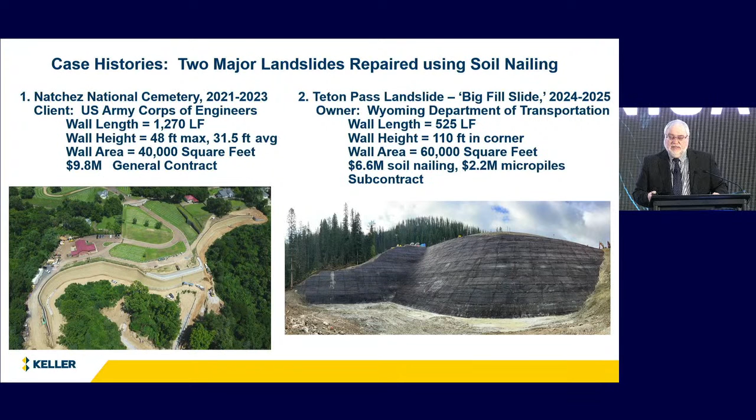So, Natchez Cemetery.

Another theme for my topic is repeat business, repeat clients. This was the third project we had done in Natchez for the Army Corps of Engineers. The previous ones were a long time ago, quite early, as I'll show you here.

If you've never been to Natchez, you should really take the time to go. It's really New Orleans in Mississippi. It's a very fun, lively town with a nightlife, an eclectic town with a lot of artists and really great food. I've spent a lot of time in Natchez, and I really love it there.

This is a national cemetery on the north side of the city. The city you see here on the left side is down a little lower, and as you work your way up the Mississippi River, that is the cemetery. That site is located there because it was the location of two really major Civil War battles where a lot of people lost their lives, and that's what the cemetery started at. It's still open to all branches of the armed services, and there were interments going on the whole time we were there. A really interesting place.

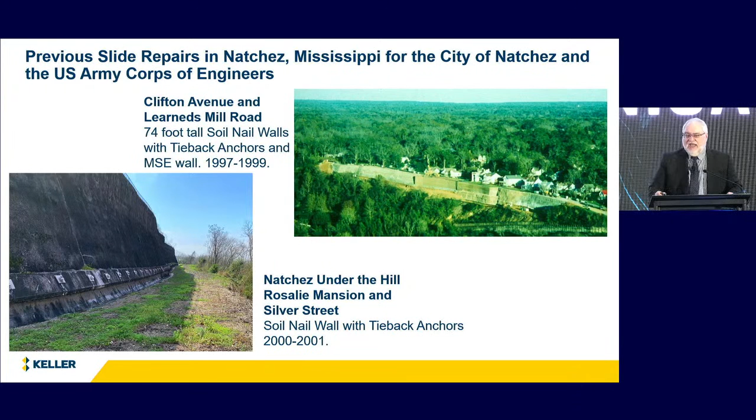Then in 2000, 2001, we did the Natchez Under the Hill and Rosalie Mansion at Silver Street. It's the wall you see on your left there, which is also a pretty tall wall, about 45 feet high, 50 in some areas, with a row of deep tieback anchors. So working for the same folks again for the Corps of Engineers. The first contract was actually for the City of Natchez, and then the second two contracts were for the Corps.

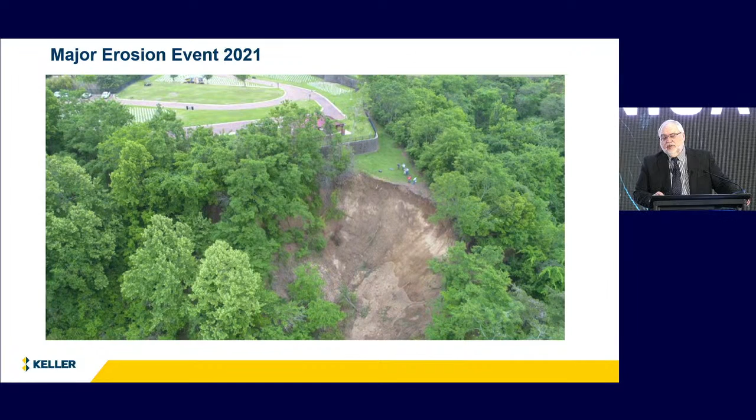The main erosion event that occurred at the cemetery was in 2021. It was a wet time, and the bluff was adjacent to this site. There was an MSE wall there and a pavilion, and during a particularly rainy time, this big slide occurred. They tried to save the MSE wall, but unfortunately it was severely damaged. They did the things that you're supposed to do - cover everything up with plastic and try to keep the water out, etc. But the wall was pretty much toast.

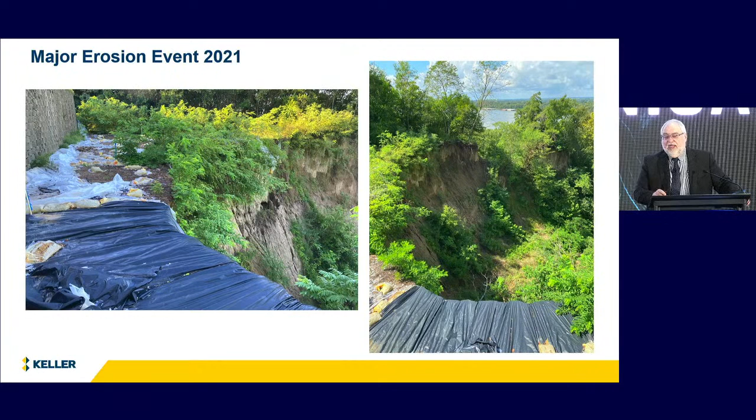And that got the ball rolling for a larger scope of repair all around the bluff where they had incipient problems that looked a lot like this.

The geotechnical conditions in this area along the Mississippi River are very similar all the way up to Vicksburg: you have this thick layer of loess. Some people call it loess - the German word I think is Löss, for loose - but it's a wind-blown silt that has a clay and sand fraction and also has a calcareous binder that kind of sticks it together. It exists in vertical bluffs very easily. In fact, if you try to put it on a 2-to-1 slope, if you cut into it, it will erode severely. So they actually cut it vertically if they're going to make a cut - they'll come down 10 feet, a little bench, cut 10 feet, etc. But it does erode over time; it is an erodible material.

This slide was in the loess, which is the Vicksburg Formation, and below that is the Natchez Formation, which has alternating dense sand and clay layers that make a really good material to bond pre-stressed anchors into.

When we first started working in Natchez in the mid-90s, we were doing tieback walls along Silver Street and learned about good bond materials in this sand. But also, the original idea came from a guy named Eddie Templeton at Burns Cooley Dennis in Jackson, Mississippi, and he called up and said, 'Hey, I saw you do a presentation on soil nailing. I wonder if we could do it in loess.' And I was familiar with the material, and I thought, I don't know - we'll have to see, we'll have to run some tests.

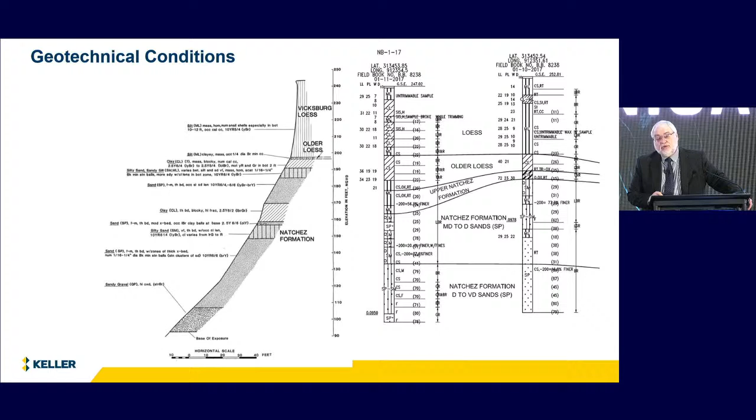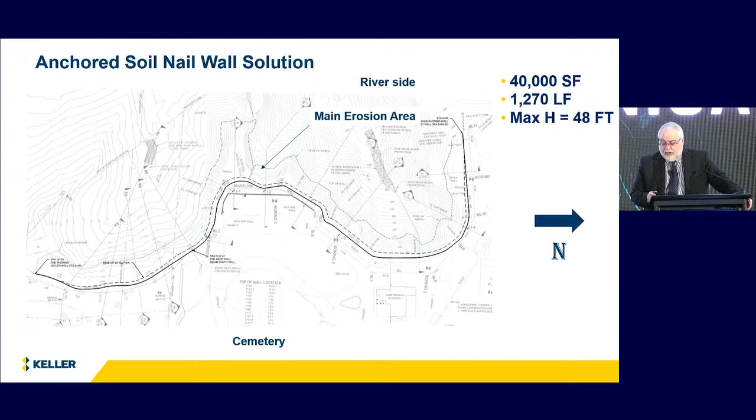Here's a plan view of the location. Like I said before, it's 1,270 linear feet, pretty long, almost a quarter mile. The erosion area that was the slip I showed in the picture is in the center portion. The cemetery is on the bottom of the slide, and the riverside is on the top. It meanders around the cemetery, and even goes around some residential houses on the side that were threatened as well. The maximum height, as I mentioned before, is 48 feet, average height 31.5 feet.

I'm not going to talk a lot about design, but let me mention a few things. The consultant for the Army Corps of Engineers on this project, who wrote the report and did the borings, was Burns Cooley Dennis out of Jackson, Mississippi.

The thing about doing this type of soil nailing, as you saw in the pictures and references, is you can get really great stability numbers, but the nails have to be really long, and they're closely spaced—maybe 5 by 5, 6 by 6 feet or whatever. The lesson we learned early on was that you can soil nail and get decent internal stability, but to get that external, global stability, you include a deep anchor.

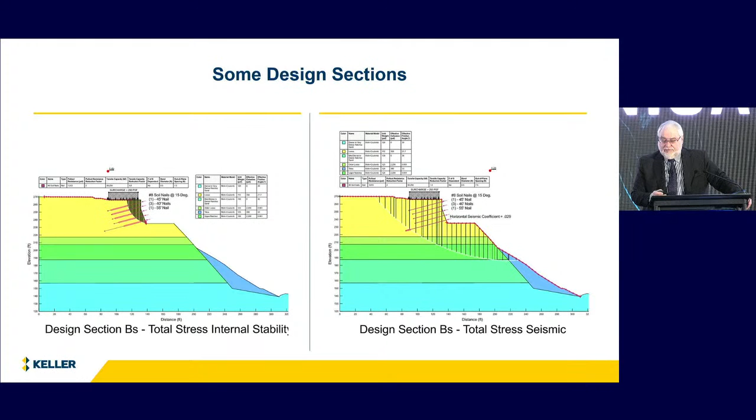This is another section showing internal stability and external stability at a different location. For the external check, we're applying a pseudo-seismic acceleration specified in the specs by the Corps, and checking our factors of safety. So that's the design.

So that's the concept—soil nailing for the 40 or so foot sections. It was 7 rows of soil nails, 40 to 50 feet long, on a grid pattern of 6 by 6 feet or 6 by 7.5 feet horizontal spacing, and then a single row at the bottom of the wall of deep tieback anchors, 150 to 180 feet long.

What we did was come up with a concept to shotcrete a big waler beam, a reaction beam at the bottom, that would support the loading from these big post-tension anchors that provide our global stability. The tricky part about this soil nailing is the failure surface comes right up to the surface.

You'd like to soil nail from the ground if you can, but if you don't have enough room to make a bench, you have to reach over, etc. It makes your soil nailing work better if you're on a batter—the forces work out to be much less—but you really can't batter if you've got a constraint at the top, either a structure or lack of room.

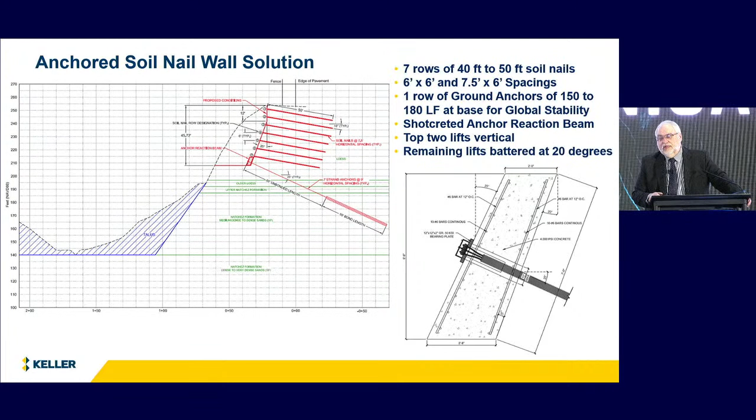So what we did here was go vertical for the first 2 lifts to give us enough room to get a bench in, so our people could work on foot. Then as we went down, we had enough room to get a drill and personnel in at those lower levels. So vertical for the first 2 rows, and then we battered the wall out at 20 degrees, which really decreases the forces required to get the proper factor of safety.

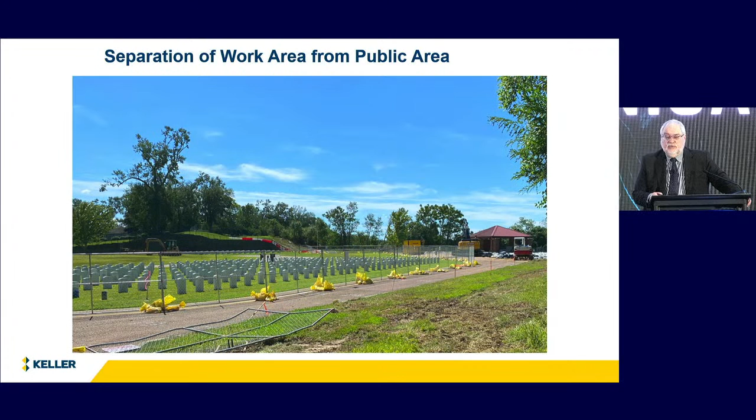So we separated our work area from the cemetery. As you see here, the access road—we were right adjacent to the graves in this area. And when the MSE wall failed, it also severely damaged an interment pavilion that was located there.

That had to be demolished as part of the project. We also had an additional scope of building a new MSE wall, but this pavilion was not replaced because there really wasn't room for it anymore. We actually stepped back into where the footprint of that pavilion was in plan view.

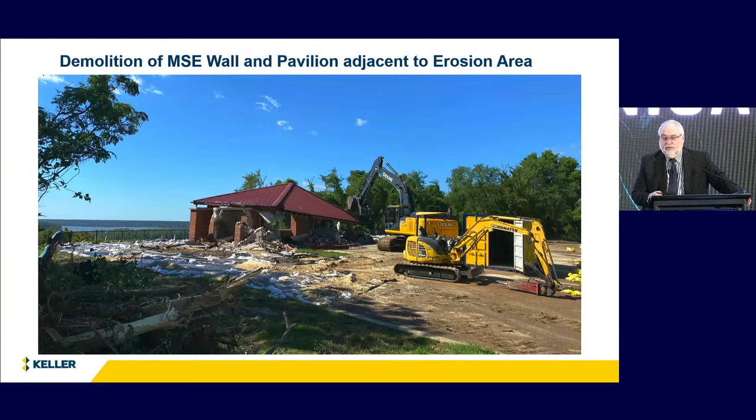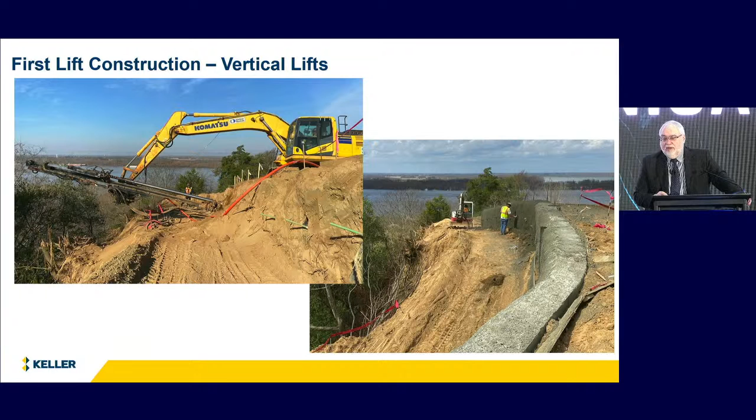These are not hollow bars, they're solid bars - number 8, 1-inch diameter, epoxy coated all-thread bars. Here you see the soil nails being drilled in, and then the shotcrete installed lift by lift. This is a top-down process, which is very economical. Instead of building the wall from the bottom up, we build it from the top down as we go.

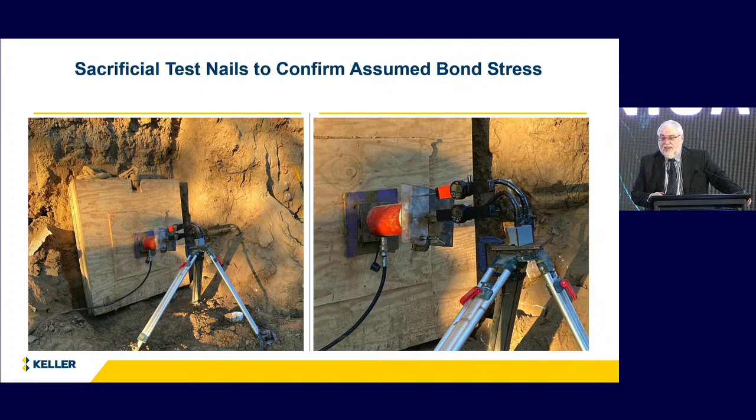We ran a series of pull-out tests on every row to confirm the capacities we assumed in the initial design. These were sacrificial nails, a little shorter than the standard nails typically - some are long, some just as long, some shorter, depending on what we're looking at. So you're looking at bond all the way along the nail. This is not a post-tensioned element, it's a passive reinforcement, and they're fully grouted.

Here you see the shotcreting process. We go down lift by lift, 6 or 7 feet at a time if we can. Soil nails are drilled in, and then we apply reinforcing to the ground.

You can see the loess soils here in the foreground, kind of a tan color, tannish yellow - loess actually exists all around the world. 15% of the world has loess, some type of wind-blown silt on it. This loess came from the glacial age, Pleistocene age, when there were braided streams during the melt that ran down along the Mississippi River Valley, and wind would blow the silt in the dry times and cover up a lot of the areas down the center of the U.S.

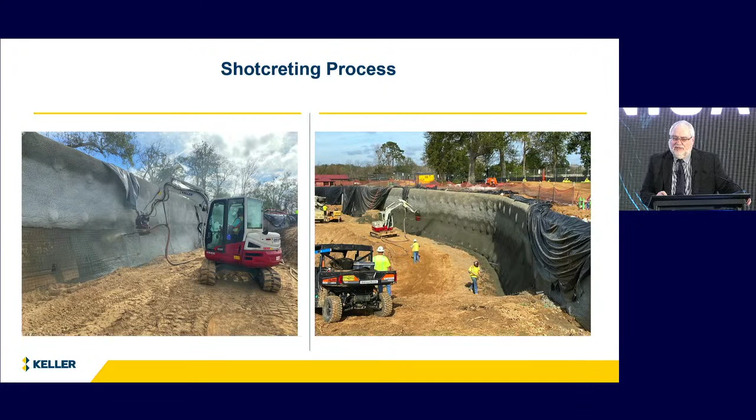Here you see our robotic arm for shotcreting. It's a very safe way to do it. It's a challenging process to do shotcrete properly, and it's not for the faint of heart, but this is the shotcreting process. Here you see we've gone vertical now for two lifts, and now we're coming out at that batter, the 20-degree batter, drilling nails in and working our way down from the top down.

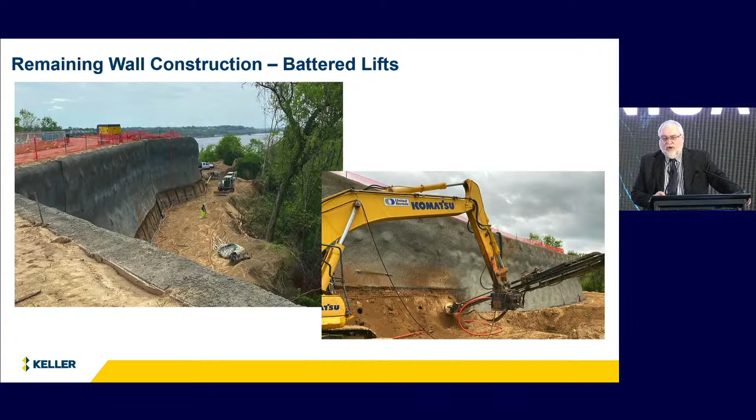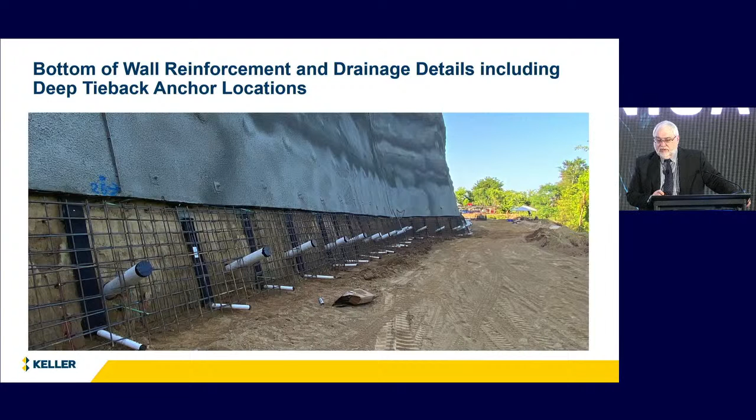At the bottom, this will be the location - you see these big PVC tubes. We're creating a void through that lower reinforced shotcrete reaction beam using these PVCs. You also see the drainage - these are chimney drains placed in the rows between the soil nails to keep any hydrostatic pressure from building up behind the shotcrete. It's a watertight concrete system, so this gathers the water so it won't build up behind the shotcrete. Then we put weep holes at the bottom, and there will be a paved ditch at the bottom for the weep holes to drain into.

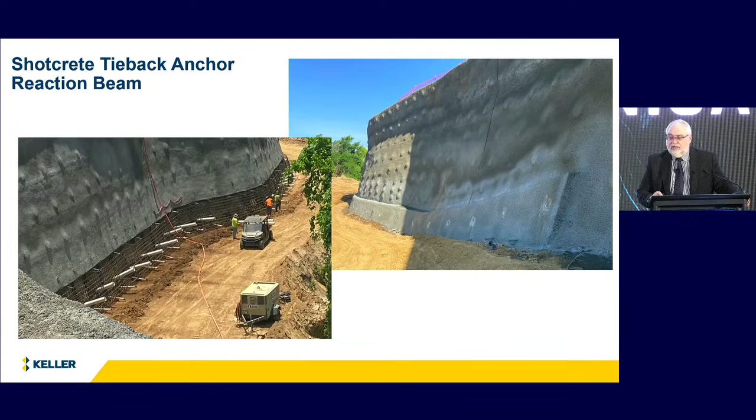Just another view here - you can see the change in angle in the wall from vertical to the 20-degree, and then prior to shotcreting, the reaction beam, and after shotcreting but prior to the anchor drilling. Then we brought in a hydraulic track drill to drill these deep 150-plus anchors. We use strands for these to get to these high loads of almost 250 kips. The spacing varied depending on the design section, the height of the wall, etc., for these strand anchors from 6 to 10 feet center to center.

There you see an uncoiler that we're using to uncoil the strand anchor down the hole. It also includes a throwaway tremie tube that stays in there, which we use to pump the cement grout from the bottom up. It's a 0.45 water-cement ratio grout that hardens typically in the range of 8,000 or 9,000 PSI - pretty strong.

So we had a tricky outside corner, which I don't know if you noticed in the plan view I showed earlier. To deal with that, I like doing it radially. Some people try drilling crisscrossing anchors, but I've found through the years that radial support actually matches better with the earth pressures applied, and works very well as far as avoiding interaction of drill holes.

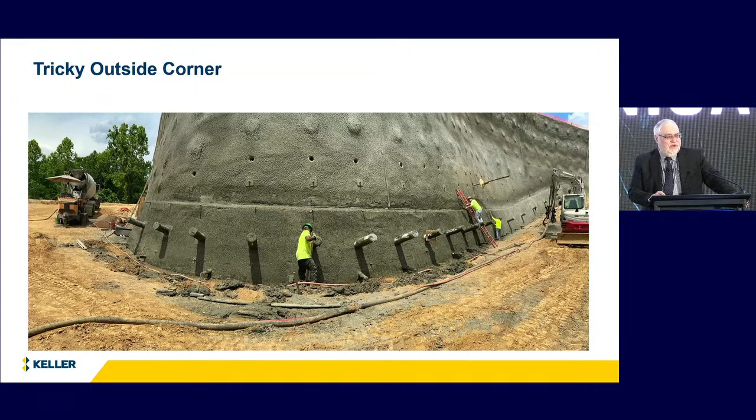One of the things that happened on this corner was - you're trying to excavate around a corner, trying to keep a 20-degree angle, and it's pretty hard to do. So we lost our 20-degree angle there, and it was noticed by our crew and the Army Corps people. We reported that back to our designers, and it actually decreased our factor of safety because you get a little more earth pressure load when you're not on that angle. So we had to add this extra row - you see the drill holes are in there around that corner - to get our factor of safety back up.

The MSE wall was replaced at a slightly different location back from the bluff area and from the soil nail wall. We subcontracted that to a small contractor out of Mobile, Alabama. They did a great job.

Then the wall was stained using a concrete stain to match the loess, and this is a picture here of us applying that stain.

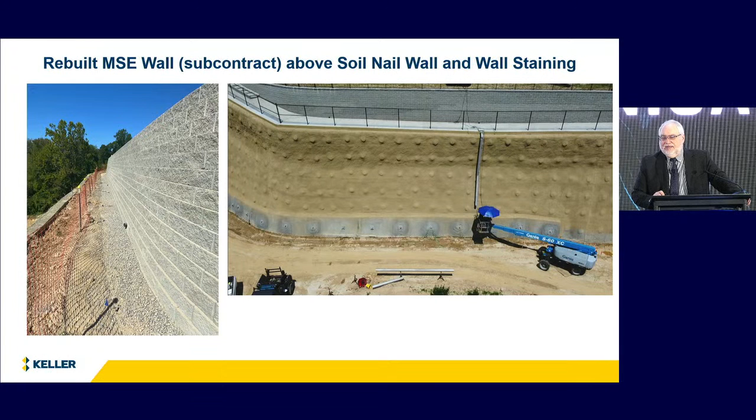You also probably notice the bumps at every soil nail location. We do that for economy rather than using a lot of shotcrete to provide the necessary 3 inches of cover or so. We just bump it up around the bearing plates at those locations, and so this is called a bump wall, and that's what the bumps are all the way around.

At the end, we got to the bottom and created an access road as required by the specifications. We put in a ditch to collect any water out of the weep holes, and then they were accumulated with pipes that ran underneath the access road and were taken downhill with an elevated pipe structure at the low spots and put into gravel ditches to be drained down to the river.

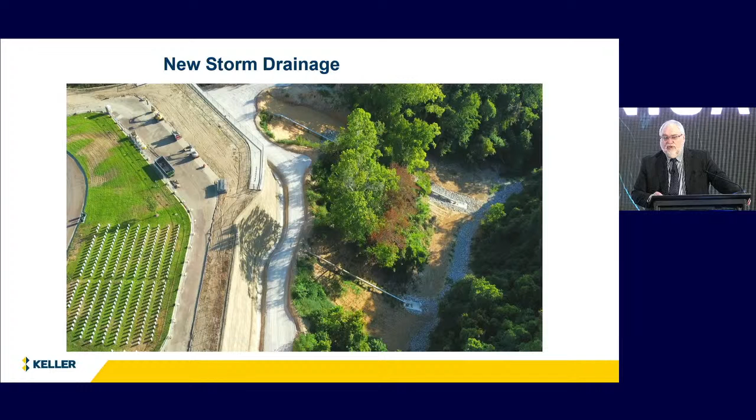And there it is from a drone view all the way around. This isn't exactly at the end, but about the best shot I had. There's also a small MSE wall on the upper right-hand corner there to make the grade transition.

So it's a very successful project. We love working with the Corps. They're good people, they're smart, they work hard, and so do we. It was a very successful project, and one that I'd love to do repeat work with repeat clients.

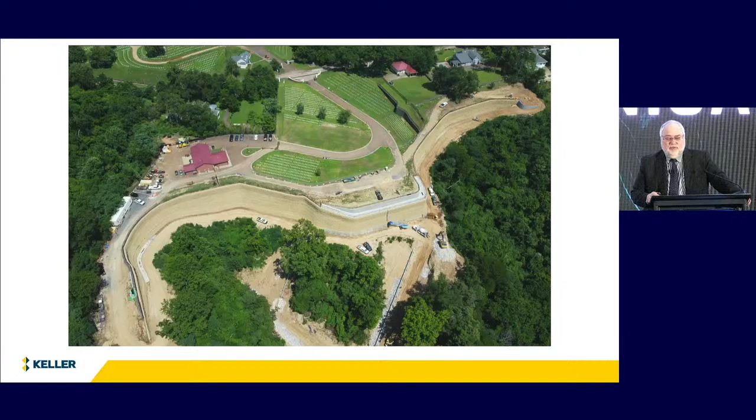So let's talk about another repeat job. This is a very recent project, it was on the news. I don't know if any of you heard it in the summer, but there was an unusual rainstorm that occurred in Wyoming near Jackson Hole, near Jackson, Wyoming. They got a tremendous amount of rain in just a very short period of time.

There was a lot of water that came down out of the mountains due to that, accumulated in the valleys, and there were mudslides at a lot of different locations. One of these mudslides occurred on June 7th, 2024, between Victor, Idaho, and Wilson, Wyoming.

Jackson Hole is a very expensive place. It's kind of a rich people's playground with skiing, very expensive rents, very expensive restaurants. Unfortunately, the service people who service a lot of those restaurants and hotels can't afford to live there, and the rents are just too high. It's like $3,500 a month for a studio apartment. So a lot of them live in Idaho and make the commute every day back and forth to Jackson Hole.

They take Highway 22, which goes through the valley or the pass, called Teton Pass. When the mudslide occurred on the 7th, the road was fortunately closed because it was covered with mud, and then some of that water built up at a really high fill location closer to Wilson. Further down, the mudslide was a little bit northwest of the landslide in the picture here, and a really big landslide occurred in a place called the Big Fill, which was a 100-foot fill placed so they could build Highway 22 through the mountain pass.

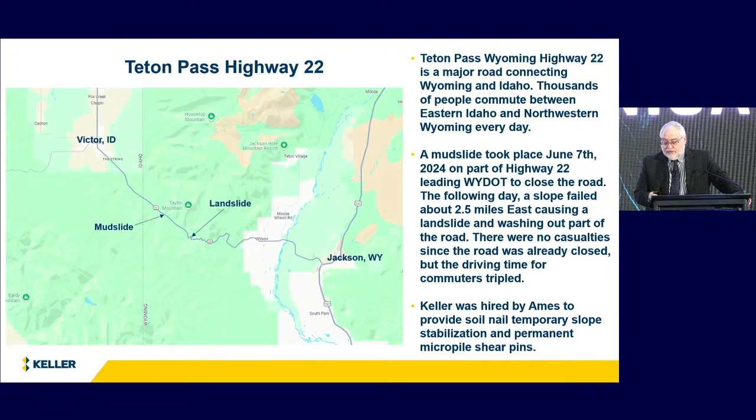So the DOT put out a request for bids. We teamed with general contractor Ames Construction, and were able to fortunately get the job.

We had a nice resume to submit to the DOT for our proposal, with 2 previous landslide projects in western Wyoming. The first one was the Blue Trail slide that we did in 1997. It was a micropile and tieback wall system consisting of 3 different walls and some really big tieback anchors, up to 18 strands, because of the high seismic requirement for the design. And that one went really well.

Both these projects are actually in the Snake River Canyon. If you look on the map on your left, the landslide is in the circle, and the Snake River Canyon is down in the red dot there.

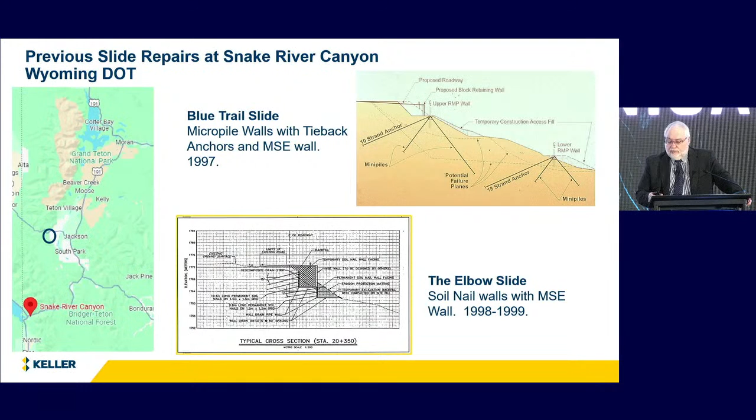The second project, shortly after Blue Trail, was called the Elbow Slide, where the Snake River turns 90 degrees, known as the elbow. The energy of the water going around that 90 degree turn ate into the slope and was causing many slides that required road repair over and over again. We solved that with 2 soil nail walls, one in a step fashion above the other, and also built an MSE wall in front so they could widen the road in addition to repairing the slide—similar to what we did at the Natchez Bluff.

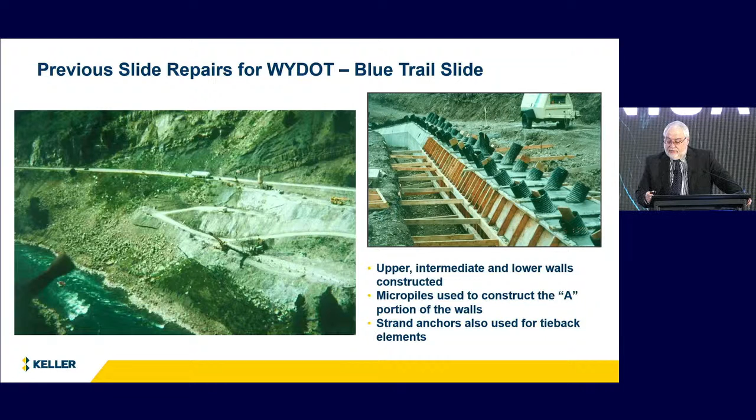It was a very fun project, one that had federally sponsored $100,000 of instrumentation back in 1997, and it's been through a lot—a couple of big earthquakes, a debris flow—and it's still there, so that was good.

At the elbow, we had these 2 soil nail walls. The lower wall we buried, so you can't see it after we installed it. The upper wall ran into a very short construction season due to eagles nesting in the area—we weren't allowed to build while the fledgling eagles were in the nest. So it ran over a winter, and this was actually our very first use of the mesh and geofabric system, a temporary steel mesh wall that lasted over the winter. Then this MSE wall was built the following year.

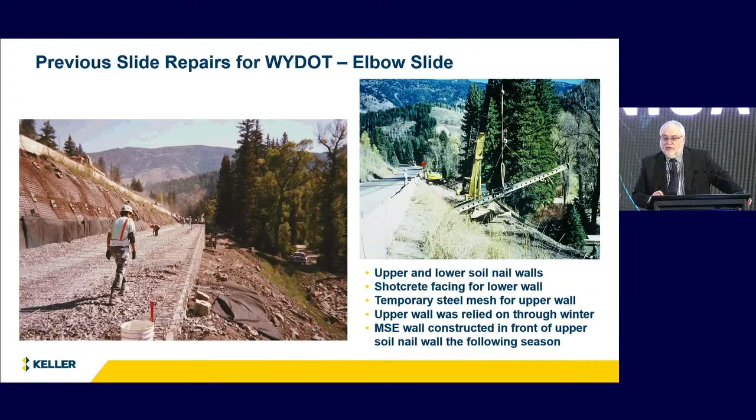But good work for good people, and they brought us back.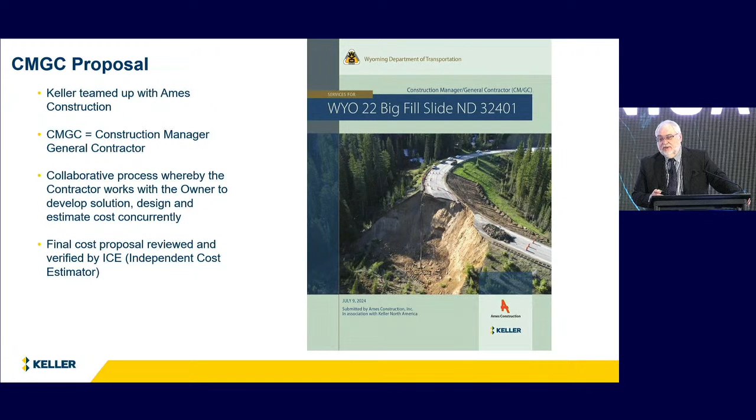The way the CMGC works is you have a collaborative series of meetings with the owner, you develop a solution and a cost estimate, and then the final cost proposal is reviewed by an external independent cost estimator. So we were successful in getting this project with Ames.

So let's talk about, okay, excuse me—first of all, not a bad place to work, okay? If you look here, we've got the beautiful Teton Mountains, Jackson Lake, Jenny Lake, ski lodges, and the job site was located in these areas.

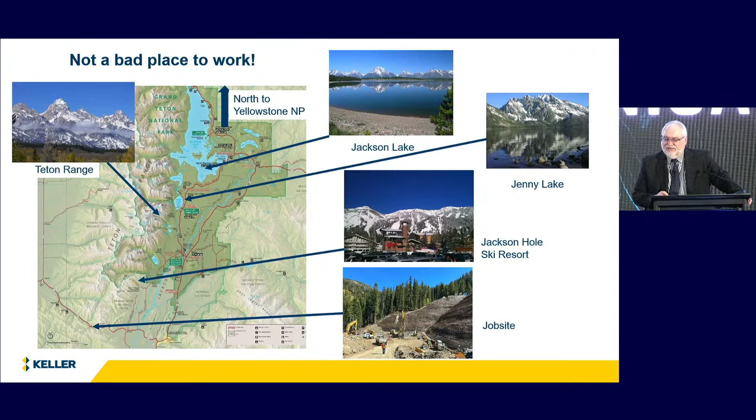It was pretty funny—our guy who goes and gets the rooms for everybody, he goes out and gets something in Wilson, Wyoming, where there were 3 restaurants: Burger King, McDonald's, and a gas station. So our guys lasted about 10 days, and then were in Jackson Hole, and made the commute. We were fortunately able to get Airbnb, so we didn't have to pay the ridiculous hotel fees. But we had lots of volunteers for this project, let me just say that.

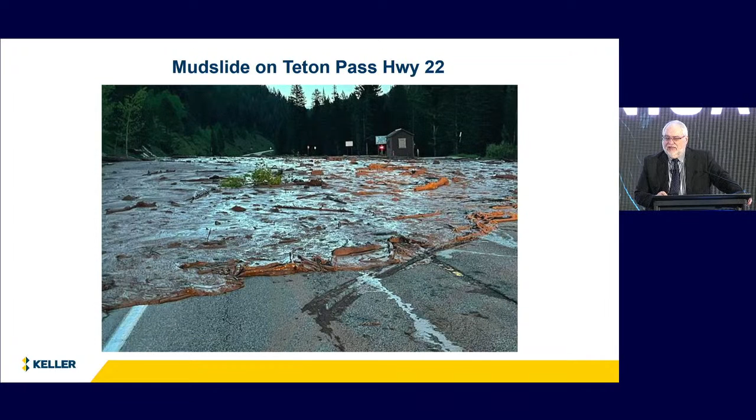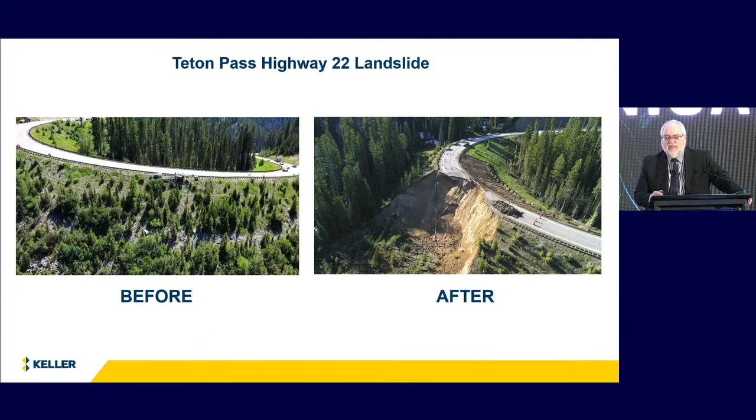Here is a photo from the DOT of the mudslide that closed the road, fortunately, which happened about a mile up from the big slide. They had a precursor, some warning that there were going to be problems here, and had already installed an inclinometer and just started to monitor it. Unfortunately this rainstorm came in, and this is a video after the first big slide occurred.

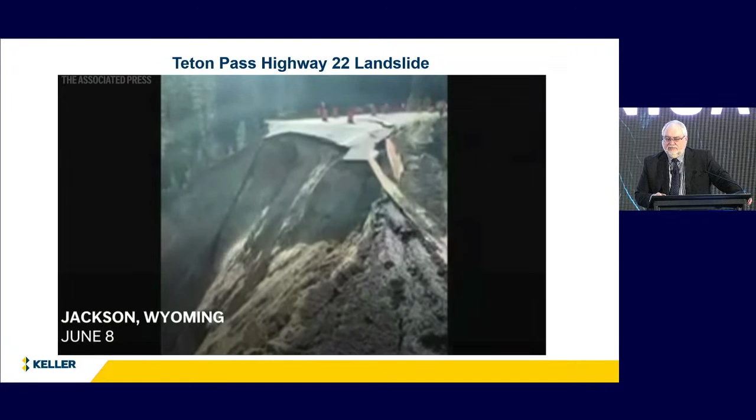I'll just watch this here for a second. So there goes the inclinometer.

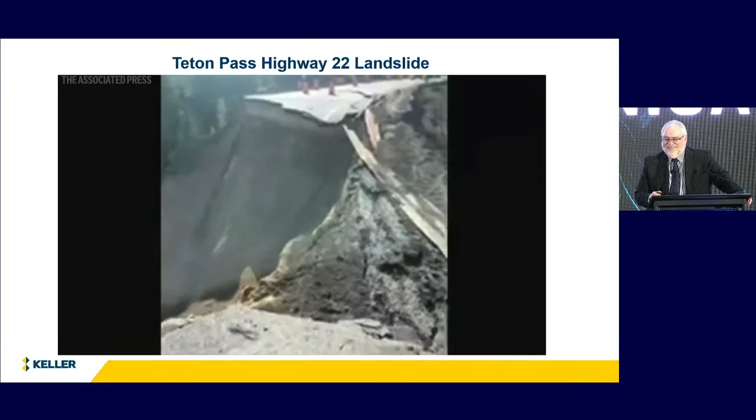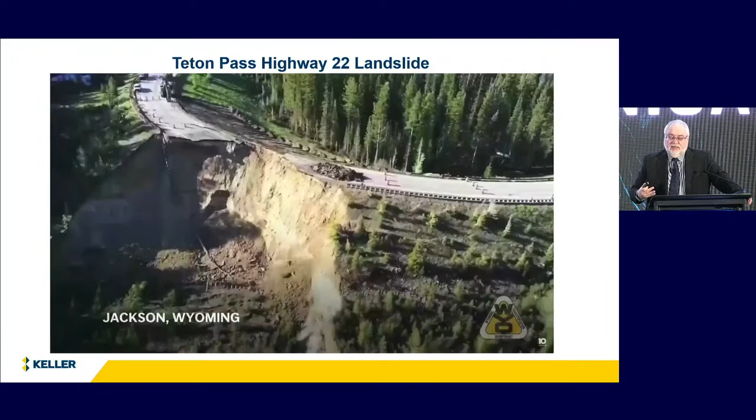So the road was closed, obviously, and then this is just another view. So they immediately began stripping the organics on the inside of the curve and hired a contractor to build a runaround on a very tight and steep grade.

You can see there the organics being stripped. They're getting ready to place 2 lanes on the inside of where this happened, and in the meantime, negotiating for a permanent fix.

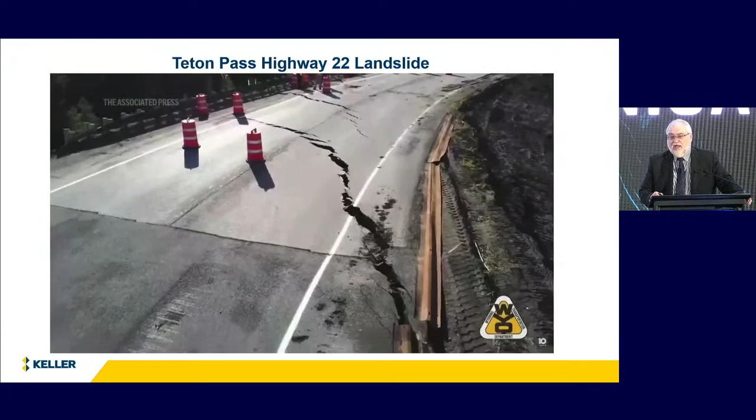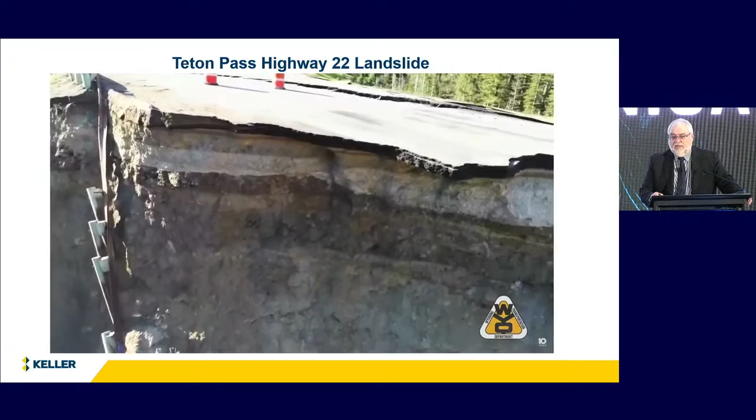That's the guardrail hanging down there. But there was a patch at this location and more guardrail at the bottom there. You can see the guardrail coming down. So basically, you had this huge rain event.

It caused where the lay of the land went from left to right there. It caused this mudslide to occur down below, but it supersaturated this 100-foot fill on the left-hand side here. And so they had a real high spike in the groundwater table, and that's what happened here.

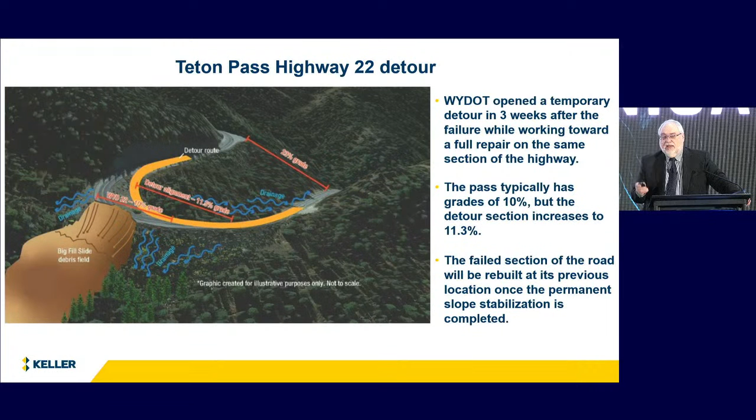And then the yellow that you see here is the temporary detour that they were able to open in 3 weeks and help the commuters while we were getting ready and designing and mobilizing to put in the permanent fix.

The permanent fix was designed by Wyoming DOT consultant out of Colorado called RJ Engineering. And the idea was a reinforced soil slope that consisted of lightweight fill. They had initially specified flowable fill, but there was no way to get a fluid material on this steep slope and to keep it there.

And so Ames convinced them to go with a lightweight fill, in this case, a recycled glass material that was sourced from the East Coast. And so this is the design that RJ came up with.

It was a 1.5 to 1 excavation in the fill itself in front of the detour. It's 100 feet deep to get to the geometry needed for the final pavement location. It was late in the year. This is at an elevation of like 7,800 feet, and so the snow flies early and it gets cold.

And they specified temporary shoring by the contractor, that you see in the blue box here. We decided to go with soil nailing, and then in addition to the lightweight fill, there are some drainage layers that you see here on the bottom and up the side, the slope side, the excavation side, are drains, and this aggregate, this lightweight aggregate, is also free draining. So the whole idea is to get the water out of the slope, right?

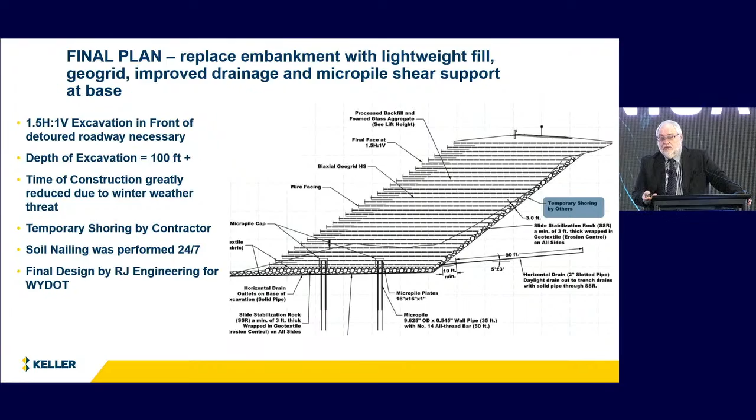So it's a little hard to see here, but basically it was an L-shaped system of soil nailing. The soil nails, originally we had 599 nails, but the geometry worked out as built to be 583. They're 40 to 50 feet long. The side against the road, parallel to the road, was 410 feet long, and then the turnaround cutback was 115 feet long.

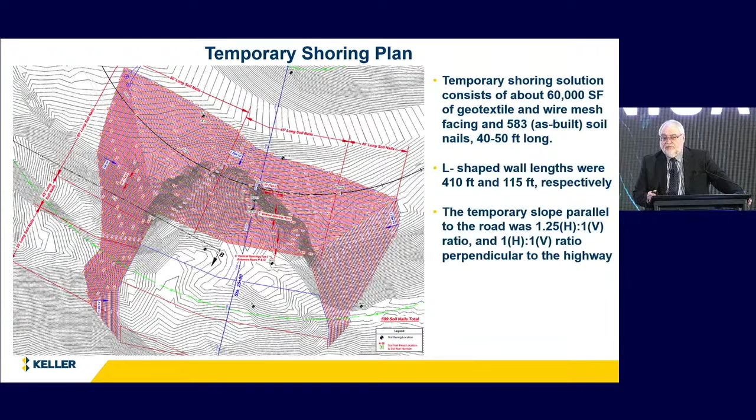So 14 rows of soil nails. They were on vertical spacing of 7 feet. The maximum length was 50 feet long.

So when we first designed it, the WYDOT folks went out and drilled a bunch of borings, but they couldn't drill a boring at this location where the one is shown on the right here because the land was gone, right? And so that boring that's shown there was not a sampled boring, that was the inclinometer. And so they didn't do any sampling.

All we had was a visual description of silty sand, gravelly sand, and then weathered shale. And so nobody could find that log. So it was eventually found, but after the design had pretty much almost been complete.

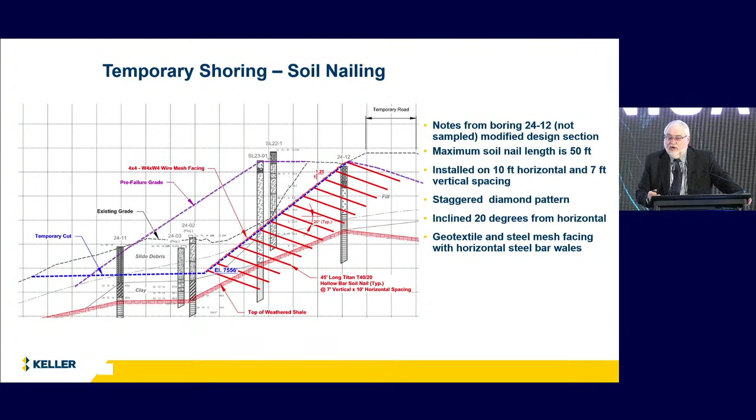And so by taking that qualitative log and being a little conservative, it put a little bit of a hump in that red line there that is the weathered shale that you see there. Prior to that, our design went more, that line went on a much less steep angle. And so initially we thought the factor of safety was going to be much lower because that's a clay layer in there. And so we didn't know that the rock was actually going to hump up there a little bit. So that affected our design midway through.

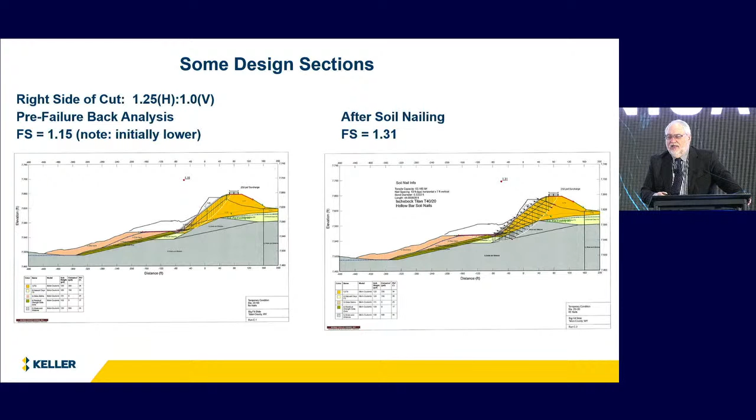But once again, that was a qualitative boring. We didn't really know what was there, so we hedged our bets and back calculated the parameters, coming up with a design with a final factor of safety of 1.31. On the far side, where we're cutting into the natural slope on a 1-to-1, we back calculated that if we made that cut, it would be as low as 0.88 factor of safety. So we designed our soil nailing there to provide a factor of safety of 1.3 as well.

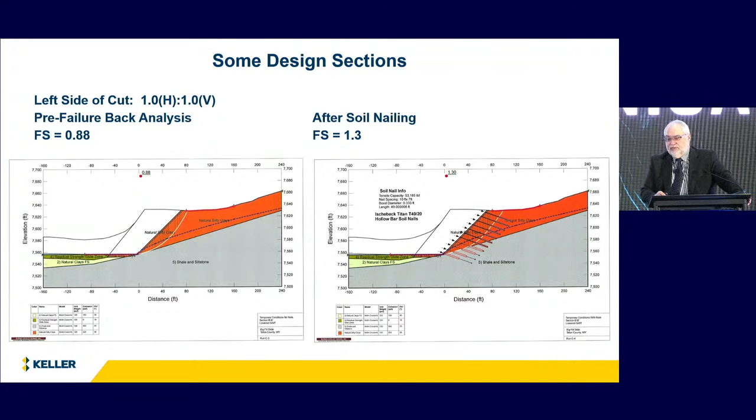In this case, we used a different type of soil nail, a hollow bar soil nail made by Ishebeck. This is a 40 millimeter diameter, 20 millimeter interior hollow bar that you can flush in place using weak cement grout. There's no actual drilling tool that you use. You put a throwaway bit on the end and flush them in place using a weak grout. When you get to the bottom, you pump thick grout, and it's an automatically grouted soil nail.

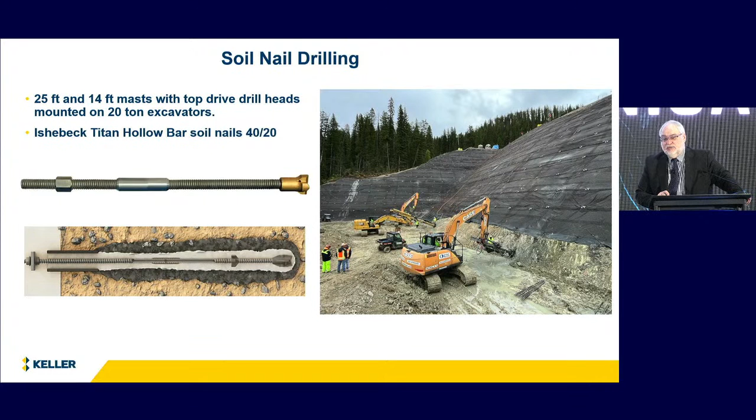We had 2 different rigs working 24/7, 4 crews, 7 days a week to try to beat the winter. One of the masts was a 25-footer, the other a 14-footer, mounted on excavators. This is just a detail of the soil nail.

They come in 3-meter sections with a coupler, and you flush them down to the required depth, which in this case was 40 to 50 feet, and leave that bit in the ground and pump them up with grout.

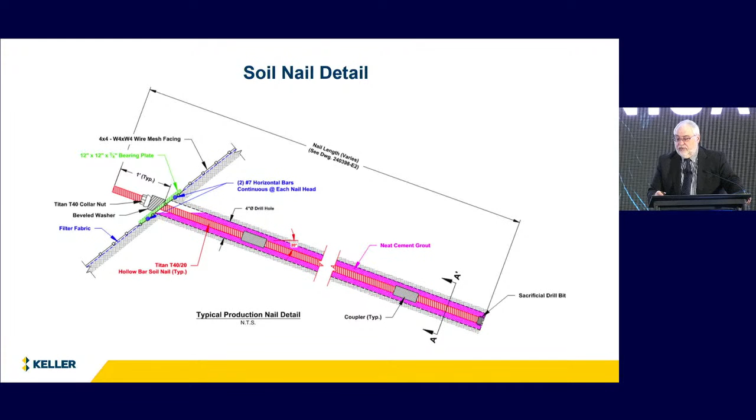In this case, we decided not to use a shotcrete facing. We were in a hurry, and it was going to be cold, so we came up with this soil nail facing that consists of a geotextile with welded wire fabric over it. Those welded wire fabrics are attached together with high-strength hog rings and aligned with tie wire.

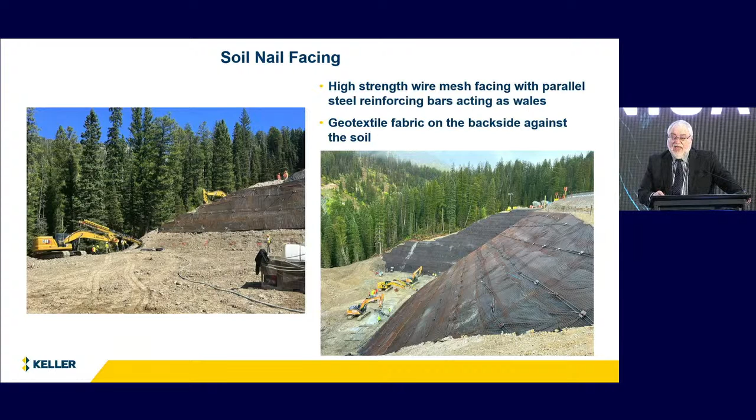In between the individual nails, we create a wale using horizontal number 7 bars that go underneath the bearing plates, which are 12 inches square. So this is a fast way to do temporary soil nail facing.

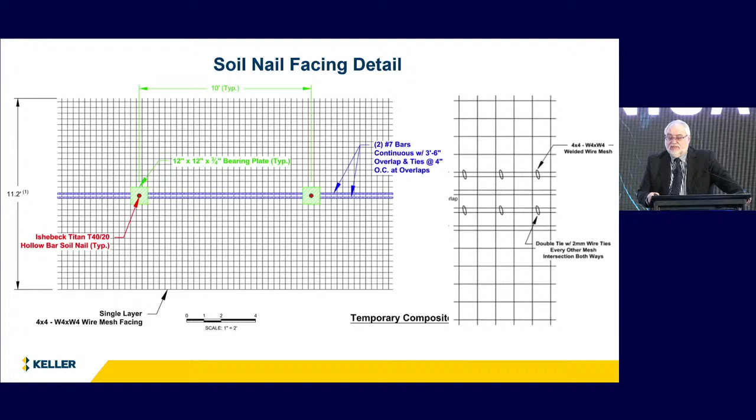This is just a detail of that. You see the horizontal bars from nail to nail, and the details of the 4x4 W4xW4 mesh. It's a high strength mesh, and it keeps the soil filtered underneath with a non-woven filter fabric.

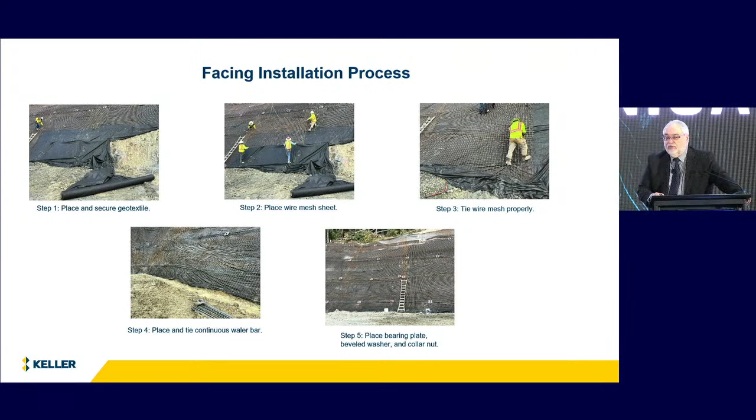We tie the wire mesh sections together, place the wale beam from nail to nail as shown here, and then put the bearing plates on the nails with a beveled washer and a nut and tighten them down. So pretty simple and very effective.

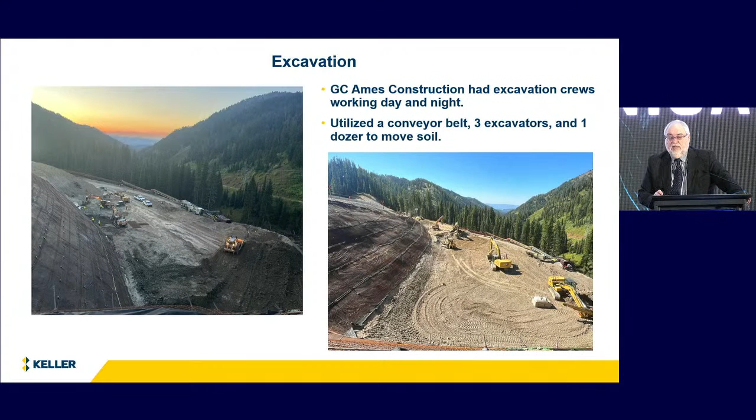The excavation was done by the general contractor Ames 24/7. They used a conveyor belt to get the soil out, a very long series of conveyors. They had 3 excavators and a dozer to move the soil, and they were always moving soil 24 hours a day. It was a large earth-moving project.

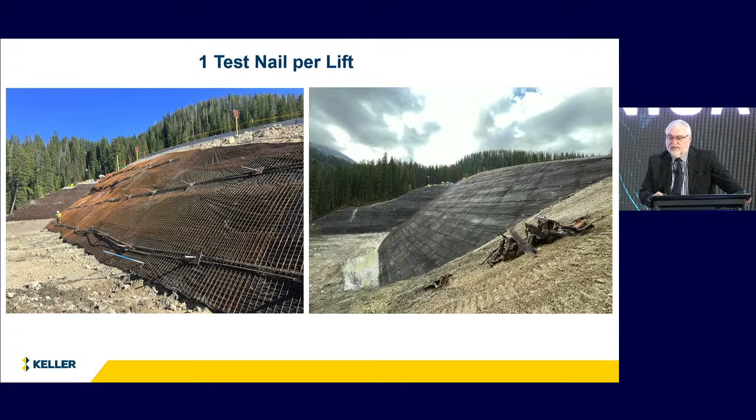We also did the test nails as described earlier, 1 per lift. That's the blue bar you see there, with a protective PVC while we're building the facing, and we went in and ran pull-out tests. We got good pull-out in this rocky fill material.

So there she is, it's a big wall. We did it in 5 weeks, 60,000 square feet. It was a tremendous effort of our crews, and we're very proud of them for that.

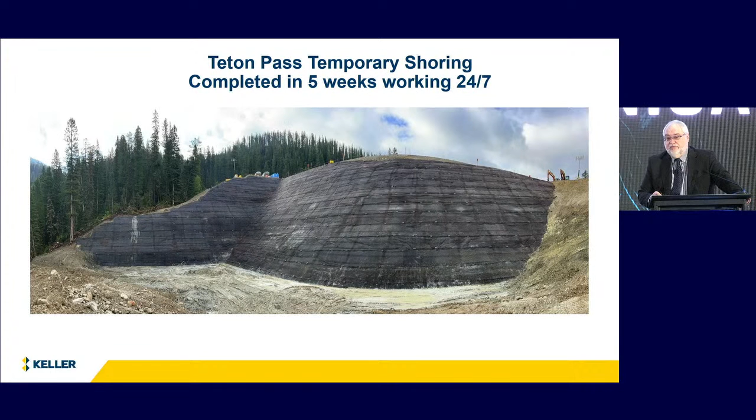So then, as part of the final design, Ames hired a specialty contractor out of Oregon called Jensen Drilling to do horizontal drains. There were 5 drains required, drilled 90 feet from the bottom of the soil nail wall into the backfill and the natural materials shown here in the blue lines.

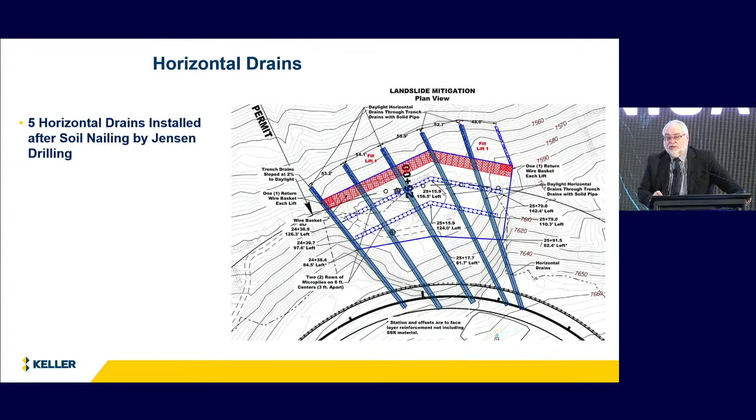The blue line across the bottom is the bottom edge of the soil nail wall. They would extend those drains through the new fill being placed out to the outside of the final wall. So there you see the location of the drilled drains in the blue line. They were 90 feet, drilled 2-inch diameter slotted pipe, on a 5-degree upward angle.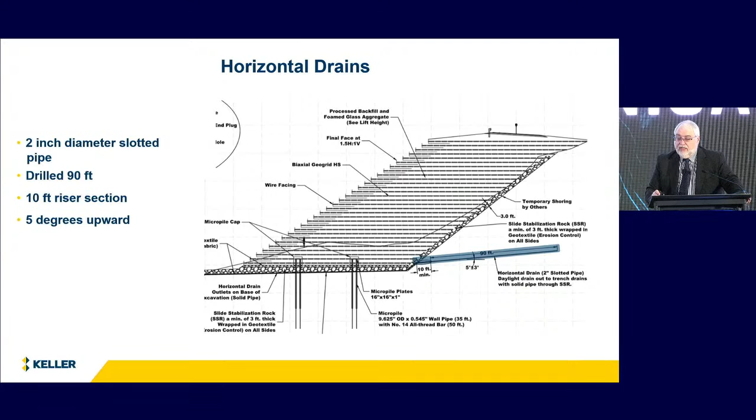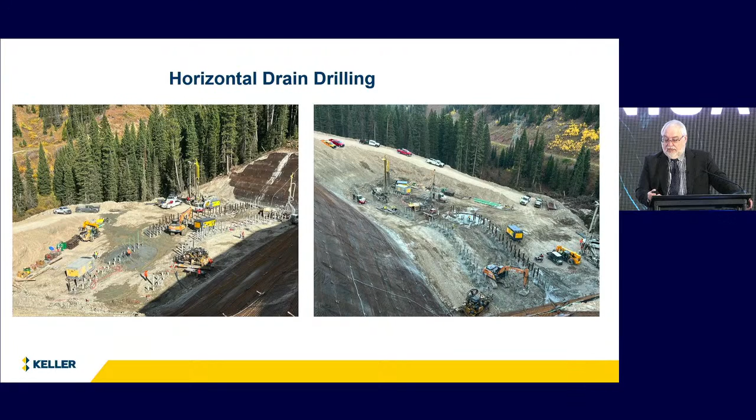As I mentioned earlier, as designed by RJ, were these permanent slope stability micropiles. There were 140 of them, 50 feet long, consisting of 9 5/8 inch outer diameter pipe and an interior 75 KSI bar, full length. The pipes were 35 feet with a 15-foot rock socket.

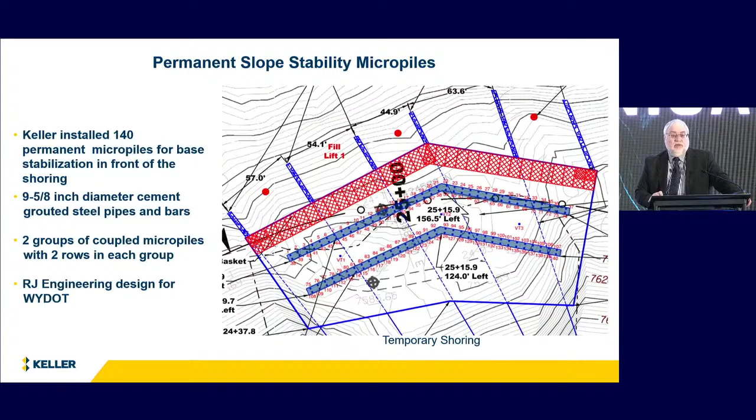When we first started drilling these, we encountered some very soft clay materials that were highly plastic in the drill cuttings, which was a matter of concern because of the earlier time when we thought, hey, I wonder if there's some residual material here from the slide, or is it natural, et cetera. So that was a concern.

Here you see the locations of the micropiles. We left 8 feet of pipe sticking up out of the ground. We were determined to do further investigation into that clay, and had a series of meetings.

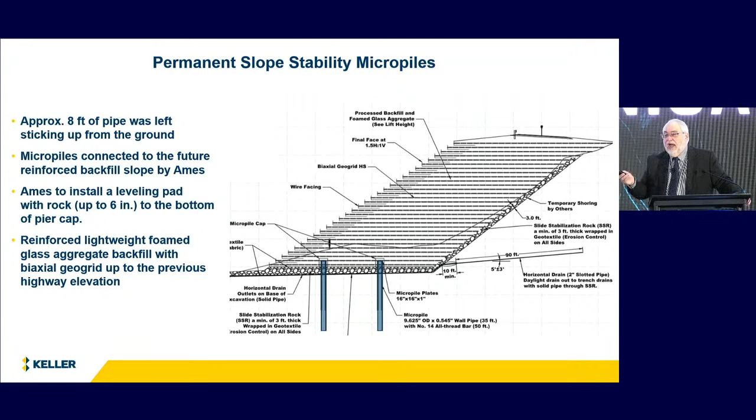Here you see the layout of the micropiles and the location of the lightweight foamed glass aggregate backfill. There are layers of biaxial geogrid that run the horizontal lines you see there. Here's the layout where each micropile cap is a 4-foot by 5-foot reinforced concrete cap. The micropiles were spaced in pairs, 10-foot center to center, with 15-foot rock sockets.

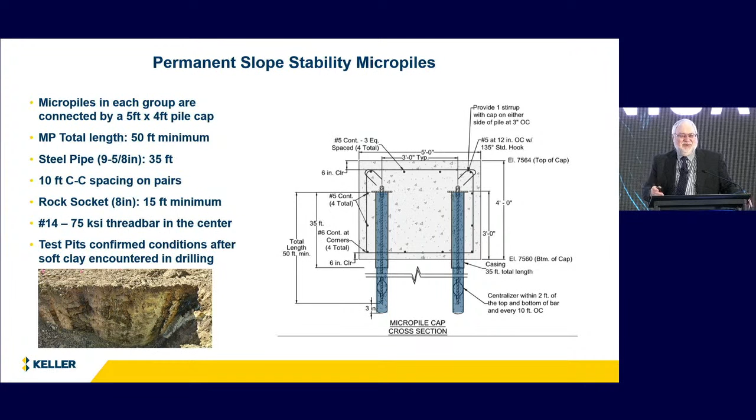So we dug some test pits, and you can see on the lower left-hand side, on the right-hand side, there's a white clay-looking thing. It was like a montmorillonite that was either a mylonite or a gouge, fault gouge or something. It was very isolated. We dug 5 test pits all along, and that was the only location, right where we were drilling the micropiles. So it was a false alarm, which was good.

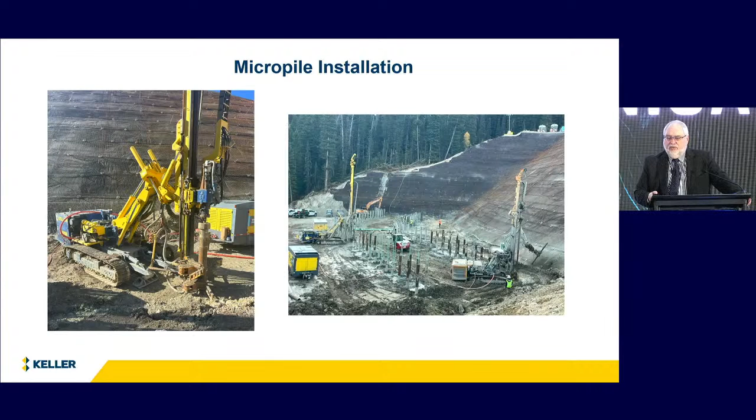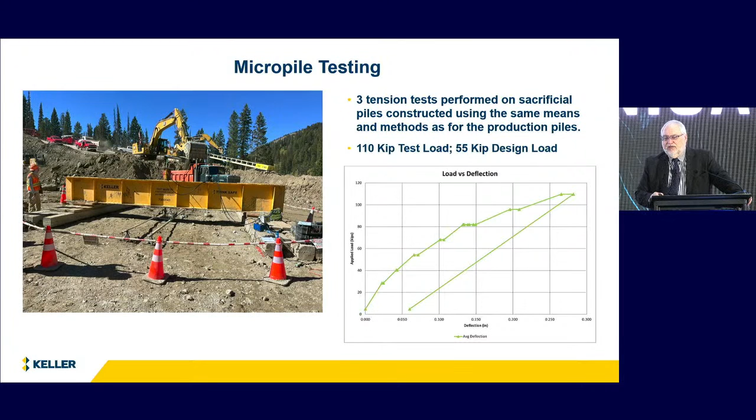Here you just see some construction pictures of the micropiles. We had 2 drill rigs, brought in a new superintendent who was a micropile specialist. We ran 3 tension tests. The design load was only 55 kips, with a 110 kip test load. We ran those tests in tension.

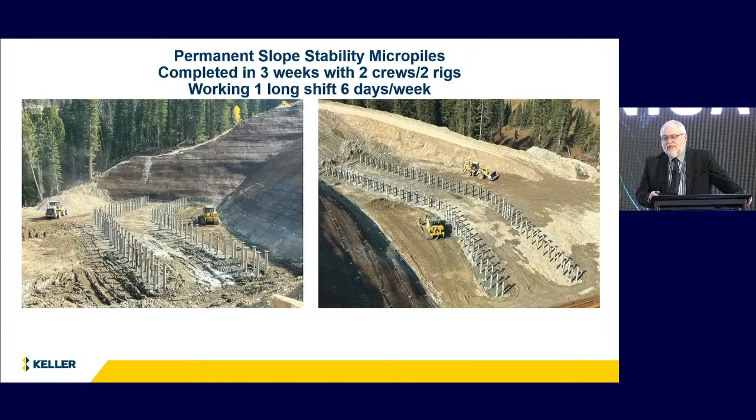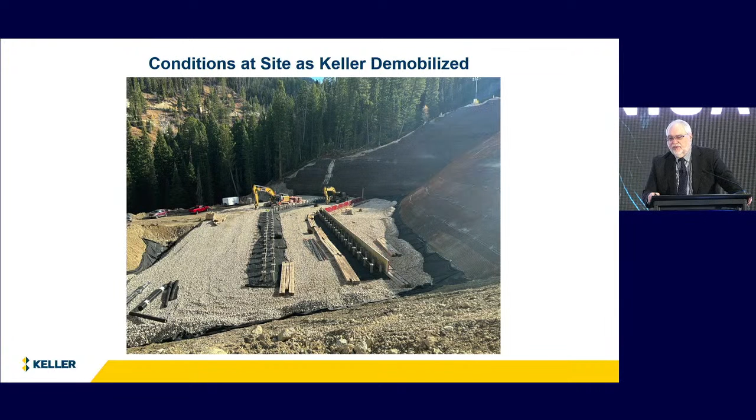And there you see the permanent slope stability micropiles. We completed that work in 3 weeks with 2 crews, 2 rigs, working 1 long shift 6 days a week. When we left the site, Ames had already started placing the gravel blanket for drainage on the bottom of the fill and starting to cast the micropile cap, as you see here with the formwork. They started hauling in the lightweight aggregate fill, but very shortly thereafter, everything turned white.

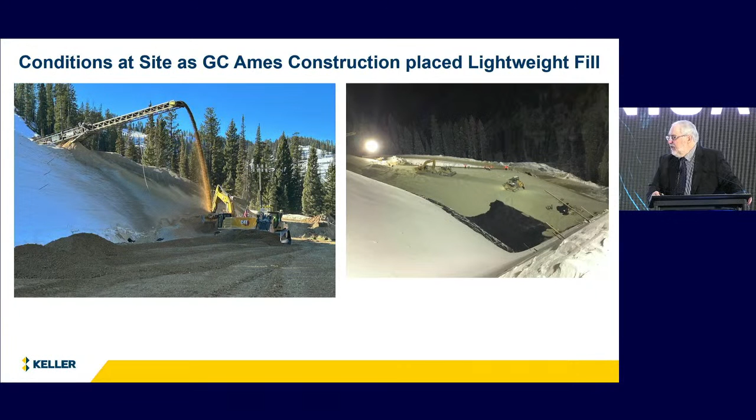You can see on the right-hand side, our wall, that's where our wall is all white there. It started snowing. They fought the good fight as long as they could in December and got about a quarter of the wall in, and then things just went to heck. We got tremendous snowfalls, minus 10-degree Fahrenheit temperatures, et cetera. So now we're waiting for the spring thaw, and they will finish it at that time.

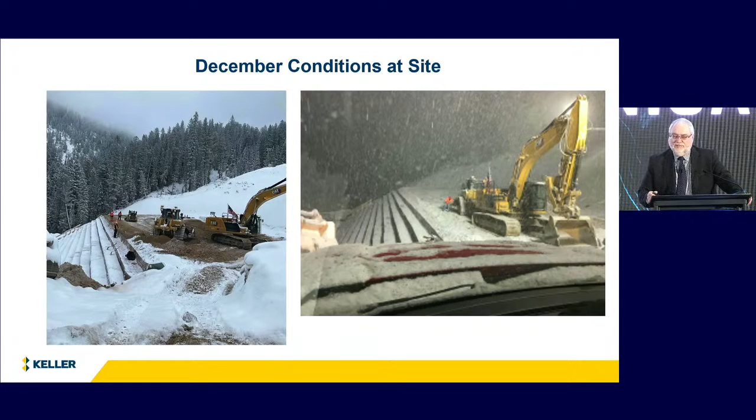So I've got a few acknowledgments. I'd really like to thank Jesus Trado, who was the project manager on both these projects.

Vice Presidents Joe Cavey and Ryan Smith, a great site engineer, Jose Areza, who did a lot of the PowerPoint for me here, and then we had Michael Caprero do a really nice fix-up of all that and make it very professional.

Superintendents were Miguel Castillo, Luis Ibarra, Donnie Cupstead, and Chris Richardson was the superintendent on the micropiles. I'd like to always thank Brad Campbell and Alex Reeb, Burns Cooley Dennis, Cole Murray and Rob Wise were at Ames, and James Dahill is the chief engineering geologist at WYDOT. He was a young field engineer when I started working with him at Blue Trail Slide, and now he's the boss.